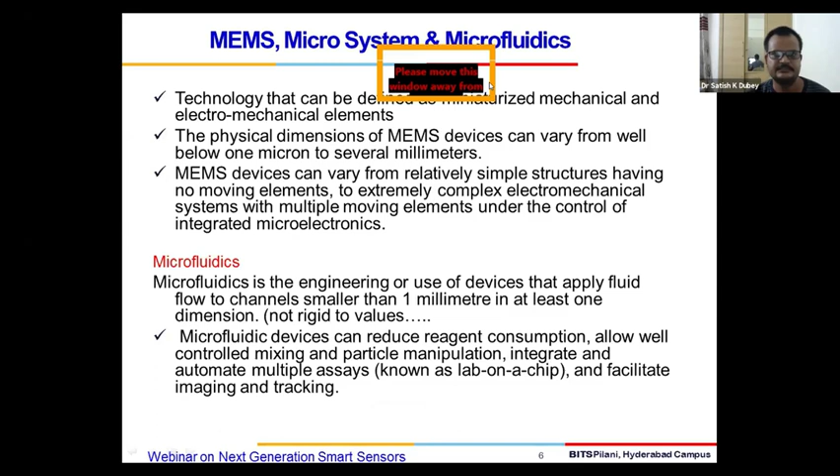So if we start with miniaturization, the first point that comes to mind is what is MEMS and what is microfluidics? Technologies that combine mechanical and electromechanical elements are called MEMS. The physical dimensions of MEMS vary from application to application. It may be very small, in micron size, or it may be up to certain millimeters. MEMS devices can be very complex devices with multiple moving components, or a single cantilever can also be a MEMS device. Sometimes MEMS devices have integrated microelectronics inbuilt with these miniaturized devices.

These days, in addition to that, a separate field is growing that is called microfluidics. Microfluidics is the engineering of devices that apply fluid flow in a small channel. These small channels may be in the dimensions of millimeters, microns, or sometimes nano dimensions. Microfluidic devices are very popular these days because they handle very small quantities of reagents, and they can easily integrate with multiple other assays. The combination of these microfluidic and MEMS devices we call a lab on chip, which facilitates various processes related to industrial and biomedical applications.

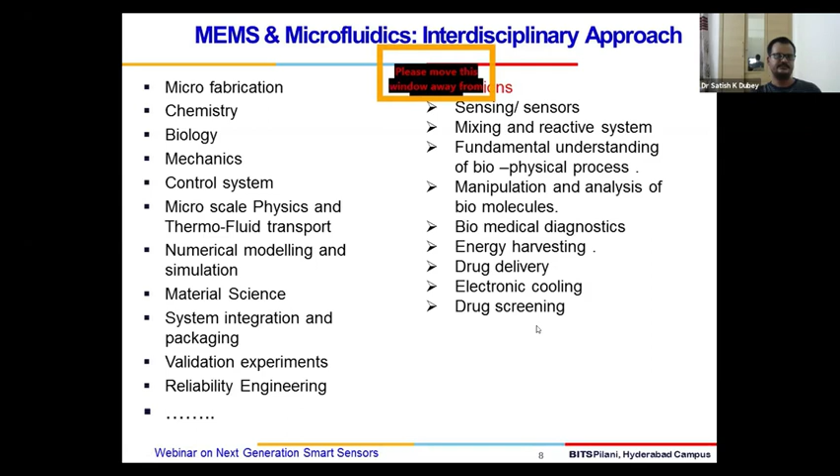It gives a fair idea that this does not belong to a particular branch of engineering or science, but it is an interdisciplinary subject. And a wide variety of applications we can see here for miniaturized or MEMS devices. Out of that, the pioneer application is sensing. In addition, there are many other applications like mixing, fundamental understanding of biophysical processes, biomedical diagnostics, energy harvesting. One of my colleagues will be talking about energy harvesting today. Then drug delivery, electronic cooling, drug screening, and many more.

So when we talk about sensors or micro devices, they follow certain steps from conceptualization to the design or final product. It starts from design and simulation, which involves a variety of simulation tools or in-house codes people use to understand the dependent parameters, how they affect the physics, and what dimensions one should work on before starting experimentation. One can use multi-physics software or their own code if the physics allows it.

Then at the same time, a variety of fabrication processes are involved in microfabrication. To name a few: photolithography, direct laser writing, soft lithography, laser engraving, paper-based 3D printing, and many more. With time, the processes are evolving at a greater pace.

At the same time, these devices or sensors use certain detection methods. These detection methods can be broadly classified as optical. When we say optical, most of the time it is related to colorimetric or image-based analysis. At the same time, luminescence-based. Luminescence in a broader sense, we say chemiluminescence, and a subset of chemiluminescence is also available in the form of

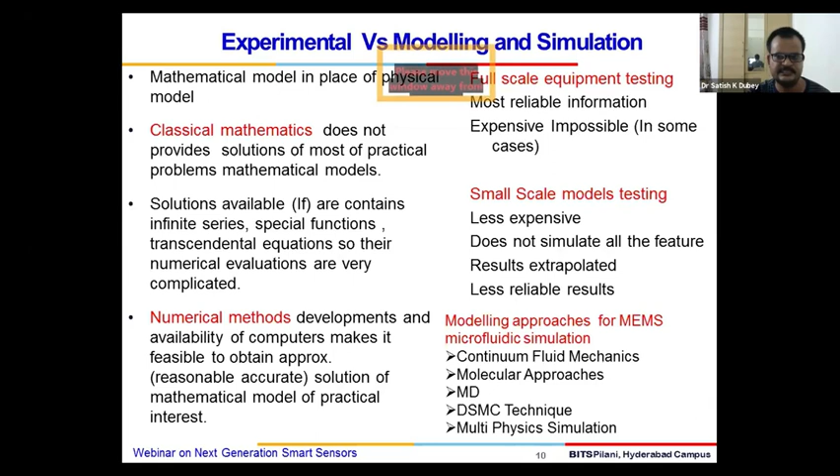So up to a certain limit of the characteristic dimensions, one can use continuum fluid mechanics. If the continuum theory is not valid, one can go for the molecular approach, like molecular dynamics, or multi-physics simulations if multiple physics are involved. So why do these simulations? Because experiments may be costly, and n number of experiments are required to understand the physical phenomena. Beforehand, one can understand the physical phenomena at greater length. So this is the importance of modeling.

So with this brief idea about miniaturized sensors, we will start talking about sensors. Sensors, as you know, are anything which can sense something. When I say something, in basic terminology, we call it a measurand.

Anything we want to measure, we use a certain device, and that device is called a sensor. These sensors may be qualitative sensors, on a yes or no basis, or quantitative sensors which quantify the particular measurand values. So the names of sensors are given based on the measurand. At the same time, they are given based on the way in which we measure. Like today's topic of discussion is electrochemical sensors. So this classification is based on how we are going to measure the value of the quantity of interest, that

is, what we call the measurand. So in MEMS or microfluidic sensors, as I have discussed a little earlier, they can be classified into three subheads: optical detection, luminescence detection, and electrical detection. Optical detection has two subsets: colorimetric and image processing; then chemiluminescence and bioluminescence are part of luminescence. If, as a result of a chemical reaction, some light is coming out and that is considered as a detection parameter, it is called chemiluminescence. A subset of chemiluminescence is bioluminescence, where the chemical reaction takes place in a living organism. The light coming out is then called bioluminescence.

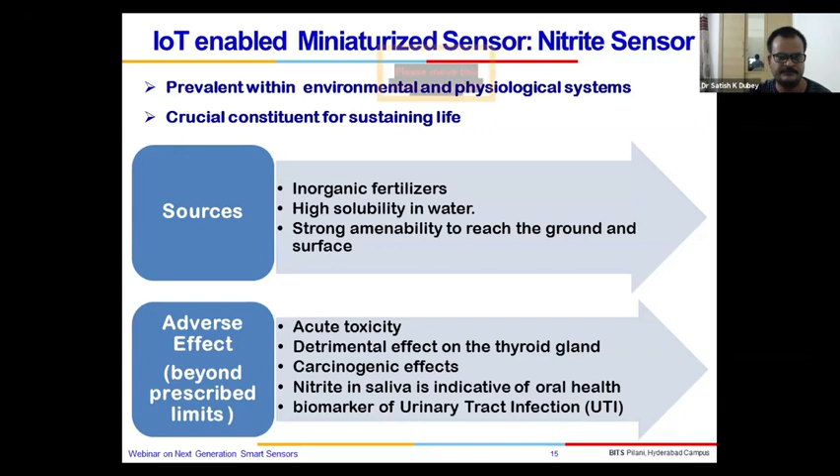So if this limit is exceeded, it causes acute toxicity and detrimental effects like carcinogenic effects of nitrites. At the same time, nitrite detection in saliva indicates oral health. It is also a biomarker of UTI infection. These are the motivations to develop a miniaturized nitrite sensor. So briefly, I am going through the different steps of the development of the sensor.

We first do simulation to come up with the dimensions of the microfluidic channel. Here there are two inlets, one for the reagent and another for the sample, flowing through small-dimension channels. And this is the detection zone. With the reagent reaction, the color will change. In this case, we are using the Griess reagent assay for detection of nitrite. Beforehand, we performed multiphysics simulation with COMSOL to find the suitable dimensions.

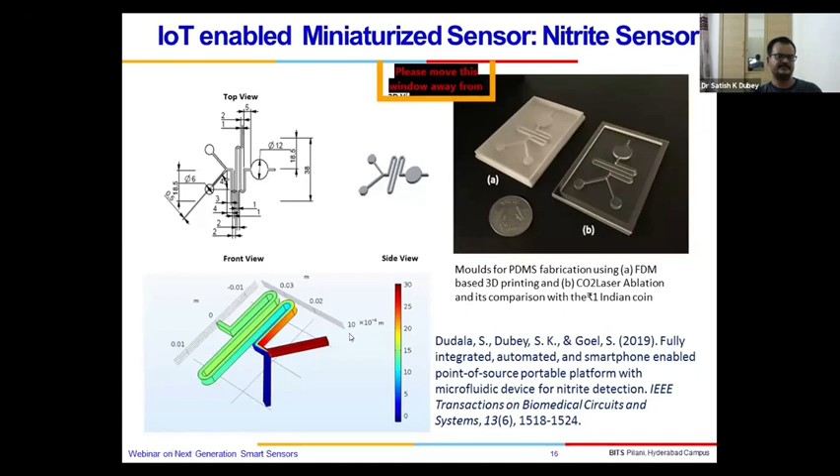This is the actual fabricated microfluidic channel. It is a 3-layer channel: PDMS channel, adhesive tape, and on the other side PMMA to close the channel. For the detection zone, we want to make the sensor smart, so colorimetric detection is converted here to photometric detection using a light emitting diode and photodiode. The photodiode was selected such that the photocurrent varies linearly with irradiation, which changes the voltage across the resistance and in turn gives the intensity.

So this photometric detection is used, and to amplify it, we designed a transimpedance op-amp circuit and amplifier circuits, and for that, this is the PCB.

So as a result of Griess reagents, this kind of color change, pink color, and the pink color intensity will quantify the amount of nitrite present in the sample, and that is calibrated in the linear range of voltage variation for these sensors. So this you can say is the device output; on another side we have absorptions, and concentrations are varying. With the known concentrations, we are able to generate a calibration chart.

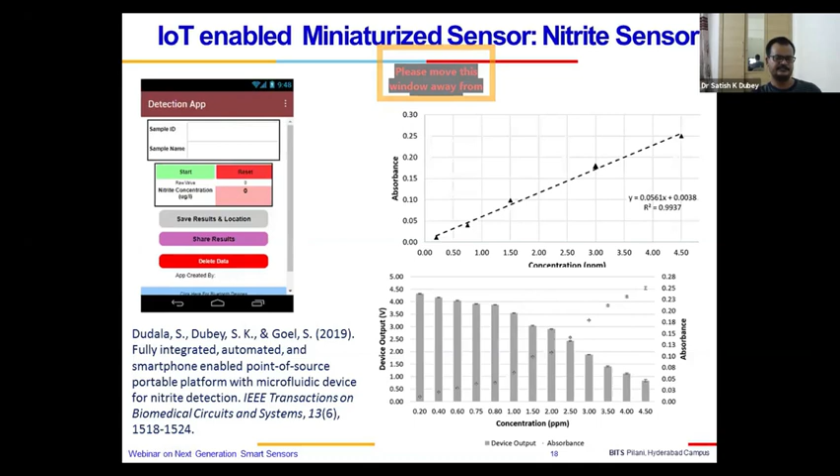And all this data is transmitted through Bluetooth connectivity. It is connected to the mobile, and through geotagging, you can transmit this data to any location or any user and application. So I think this has given a fair idea about the different steps involved in the development of miniaturized sensors. Now I will talk a little bit about electrochemical sensors. I may be a little bit fast here.

So for electrochemical sensors, we are mostly targeting the 3 electrode systems. In these 3 electrode systems, one electrode is called the working electrode, where there is an oxidation and reduction reaction of the species involved. Another electrode is the counter electrode, which serves to complete the electrical circuit of the electrochemical cell or system. The reference electrode provides a reference for the assessment of other measurement parameters.

And mostly we use the potentiostatic technique, also called chronoamperometry, which measures the current flowing through the working electrode as a function of time at a constant potential applied to the working electrode. The current flow is correlated with the concentration of oxidized and reduced species on the surface of the working electrode. It means there is a requirement to achieve surface activity at the working electrode. So in the development of electrochemical sensors, we have to modify the surface nature of the working electrode. By modifying it and obtaining suitable current peaks, we can sense any analytes.

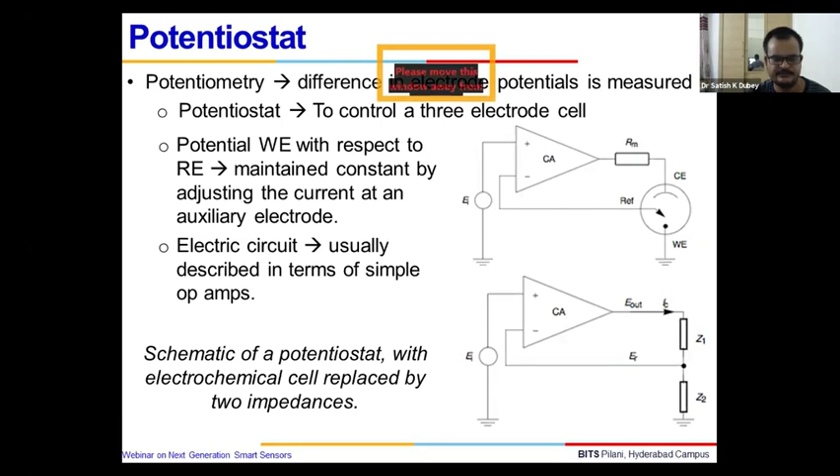So with this, here the 3 electrode system is replaced in the potentiostat with 2 impedances. So a potentiostat is required to perform the electrochemical sensing operations. This potentiostat may be a bulk system or a miniaturized system. If we use a miniaturized system and a miniaturized 3 electrode system together, it can be a next generation electrochemical sensor. This is what I have already explained.

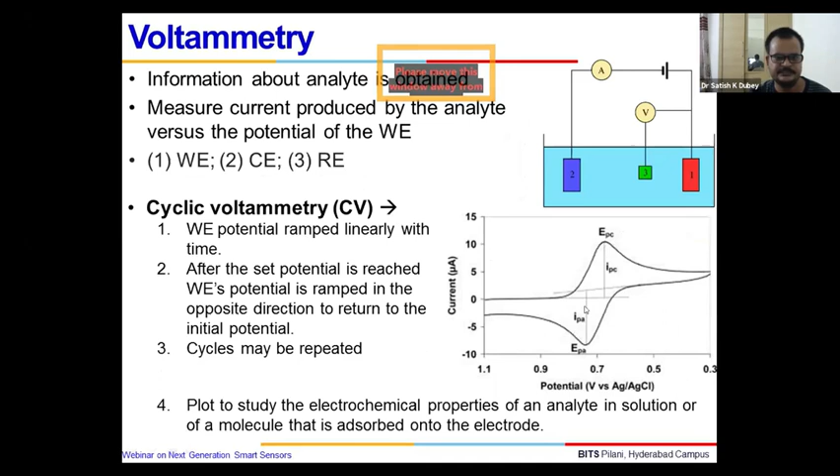As a result of this, you can find this redox loop, in which one peak shows the oxidation peak and another peak shows the reduction peak of the species. Based on the quantity of the current, we can specify the sensing application. As an application, I will take one example here: a miniaturized PMMA platform for biosensing application. So what is the motivation to do this?

As you know, ascorbic acid is an antioxidant required for immunity and cancer prevention. At the same time, dopamine is a neurotransmitter playing crucial roles in Parkinson's disease. Uric acid is another type of purine which basically controls metabolism. There are also metabolism byproducts, like xanthine. So it helps to have a sensor which can sense them all together, because they coexist in human samples or real samples. With this motivation, we have developed this sensor.

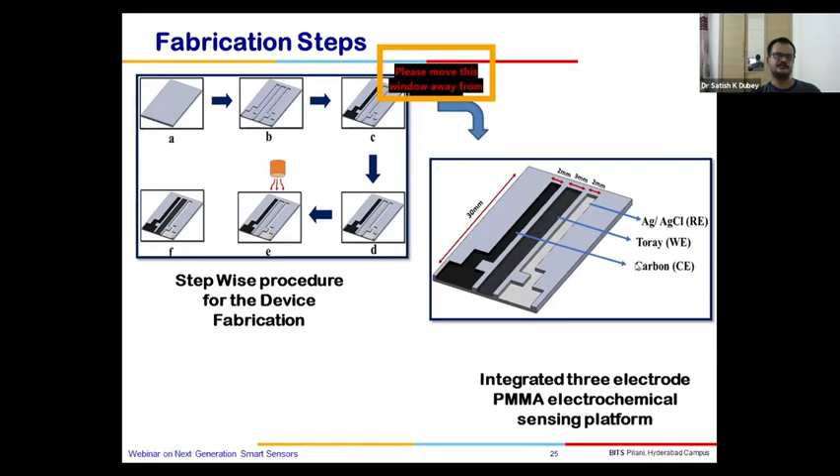So this is the step-by-step process. I may be a little fast. Here we are using 3 electrodes in miniaturized form on the PMMA slots: AgCl, Toray paper and carbon electrodes. Out of these 3 electrodes, one will be the working electrode, another the reference electrode, and one the counter electrode. For the working electrode we have used Toray paper, which has excellent properties.

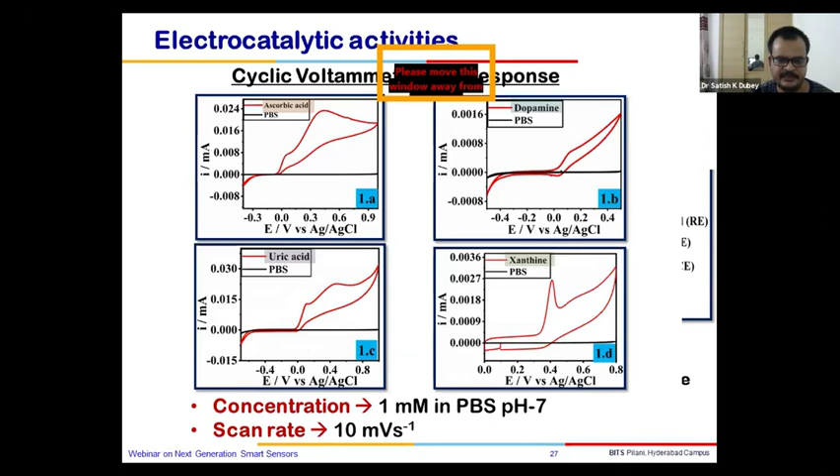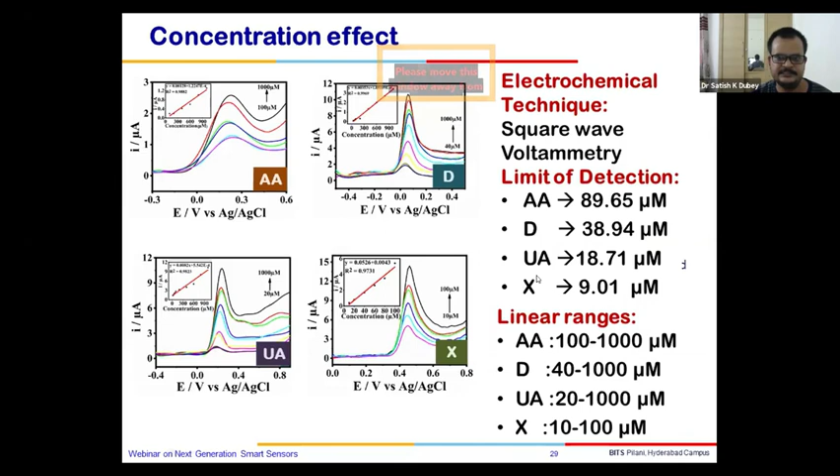At the same time, if you look here, we have performed different scan rates and identified the linear ranges. These linear ranges are shown here in the inset of the diagram, which gives good R values. For the concentration effect, we varied the concentration and made calibration plots. So it is giving the linear ranges of the sensing application. Here on the slides, it is mentioned in what range these can be sensed by developing this particular sensor.

As I mentioned, these biochemicals are present or coexist in a real sample. So we have to find out their interference. For that, we have performed interference studies, and it has been observed that there is no interference among these biochemicals. To confirm the non-interference, we have performed DPV, and the current variations observed are negligible, which indicates that these biochemicals are not interfering with each other during sensing application.

So this miniaturized platform has been developed. If it is integrated with a miniaturized potentiostat, it can be utilized as a next generation sensor for biomedical applications. Due to time constraints, I will move to one example of environmental sensors, and the others I am skipping.

The last example I am discussing here is 3D printed devices for hypochlorite. These days, hypochlorite is very commonly used as a surface disinfectant. It is also commonly used in water treatment plants, chemical industries, swimming pools, clinical industries, and food industries. The concentration of hypochlorite is crucial in deciding its use for different applications.

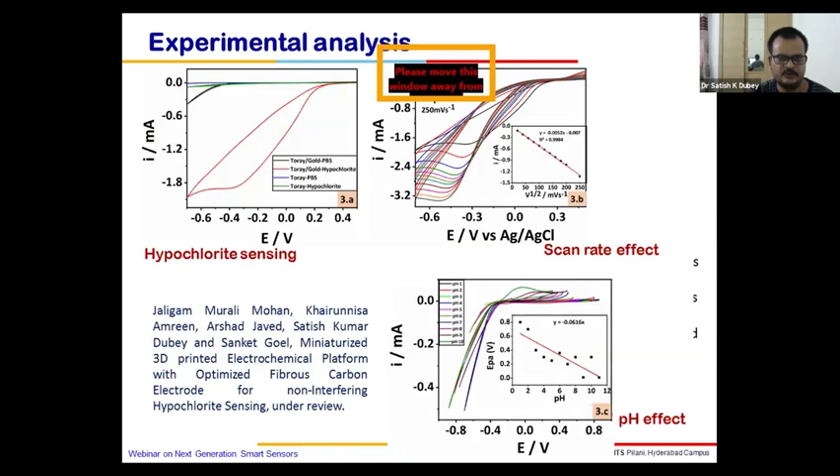For that purpose, we have used Toray paper modified with gold, which worked as the working electrode. We have used counter and reference electrodes of Protopasta. The reference electrode is modified with Ag/AgCl. We have used 1 milliliter of analyte, a very small quantity. Voltammetry studies have been performed, and it is giving very good results, non-interfering with the coexisting chemicals. So with this, I would like to close this session.

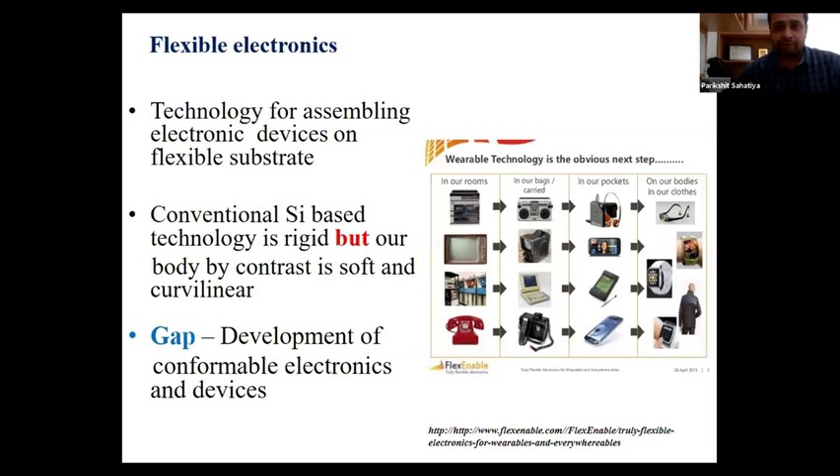But conventional silicon technology is rigid, and the future technology we are talking about is integration of electronic devices onto the body, which is soft and curvilinear. So there's a gap between conventional silicon technology and the predicted future technology. One possible solution is the development of flexible electronic components. Flexible electronics is not only about devices fabricated on flexible substrates and integrated onto the body. It is the technology that allows us to integrate electronic devices on the surfaces of everyday objects.

Just to give you a brief idea about these 2D materials, how these materials have evolved and what are the new types of materials that people have been researching on. The research on 2D materials started way back when graphene was invented. Then different classes of 2D materials evolved after graphene. One among them is transition metal dichalcogenides. It's a whole family, and it has very specific properties which are better than graphene. Some properties of the TMDs are much better than graphene, and hence for specific applications, these TMDs are very useful when compared to graphene.

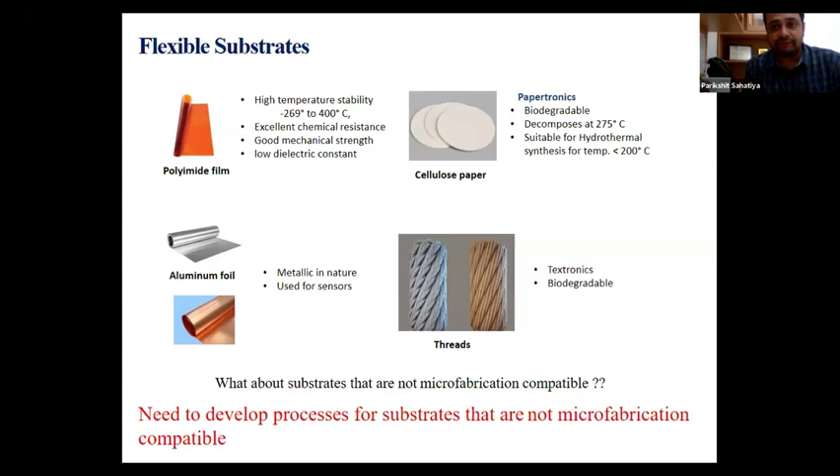So all these things, if we combine them and make a sensor to sense all these quantities, it will be very useful for the person to have a personal healthcare monitoring system. Rather than every time going to a doctor and checking, he can have the sensor integrated onto the body, and then he can check his temperature, the hydration levels, or even human motion monitoring.

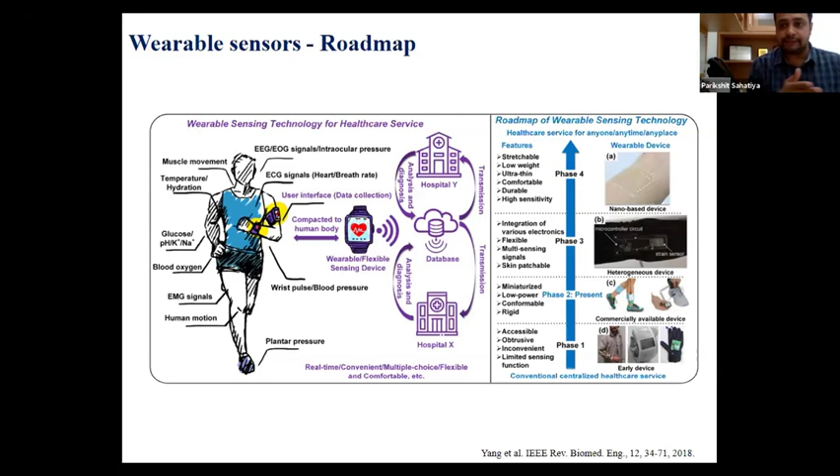So I assume I have given a very brief overview about flexible electronics. What is flexible electronics? What type of materials do we use to make flexible sensors? What are the types of substrates? And what is the roadmap, the future of these wearable sensors? Now, having said all these things, what our lab is doing is the next session of the talk that we are going to discuss.

So we are working towards the development of multifunctional sensors, again for personal healthcare monitoring. And I'll be talking about four different physical signals. So the first thing that I'll be talking about is basically the breath sensors.

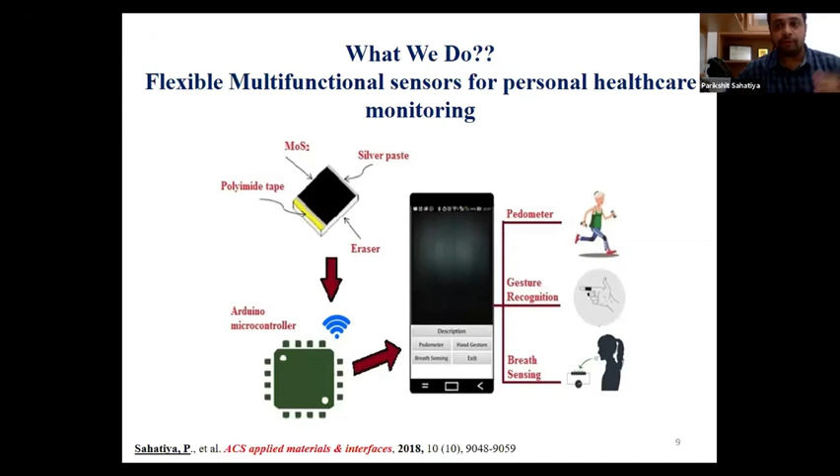Before basically fabricating any device, we need some fabrication techniques, and that I have not discussed as of now. So in general, I will not discuss it for every project. How do we fabricate? The processes that we need to develop for making these flexible sensors, I'll just discuss briefly. And it is very specific to 2D materials.

Yes, it is a big problem because, as I told you, these 2D materials are layered materials, and the number of layers basically determines the electronic properties. So if there is no control over the thickness, you cannot have control over the electronic properties. But anyway, it's a very easy method, and unless you want to tune the band gap of the material, it works perfectly fine.

And the most well-known method that people have been using for the growth of 2D materials is CVD, chemical vapor deposition. It is famous for the monolayer growth of any 2D material, starting with graphene, and then the TMD families and the other families I was talking about. The deposition rate is very high. Further, it does not require any vacuum like we have for atomic layer deposition or PLD. But the only demerit of chemical vapor deposition is that the operating temperature is very high.

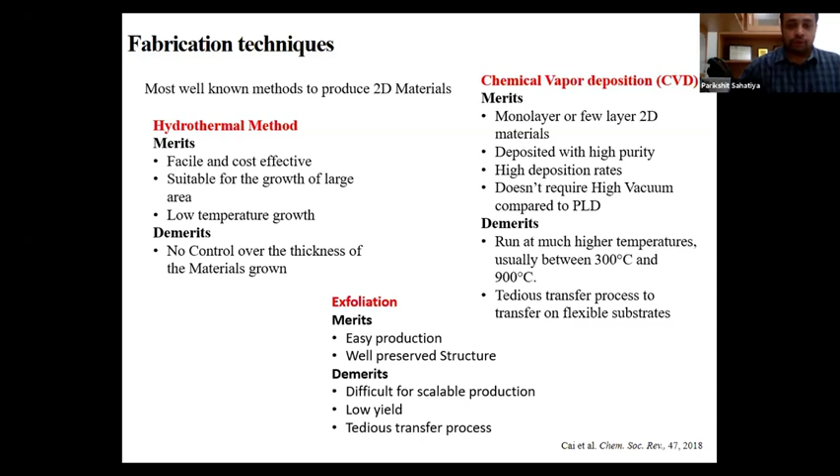So whatever applications I'm going to discuss in the upcoming slides will involve either of these fabrication techniques. So I'll not be going into details about the fabrication techniques. I'll be talking more about the applications that we have developed. But before we go to the applications, we can have one example to show you how we fabricate these flexible devices.

In this case, once you have grown MoS2 on cellulose paper, you can use that as a substrate and grow Cu2S on top of it with the desired parameters. And at the end, to measure any electronic signals, you need metal contacts, and we define the contacts using silver paste, or sometimes copper tapes and several other methods.

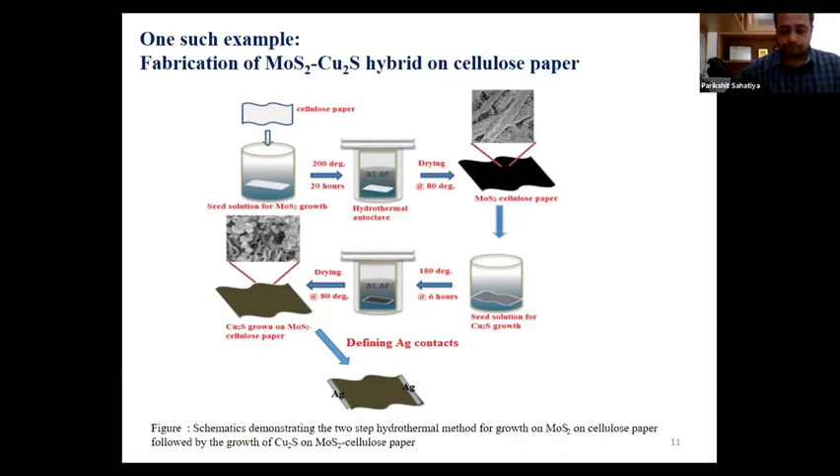So now coming to the applications, the first application is breath sensing. But before we go for breath sensing, it is very important to understand whether the device that you have fabricated is sensing humidity or not, because the breath molecules contain humidity.

Okay, the majority of the breath molecules that we breathe have relative humidity greater than the atmospheric humidity. So it is very important to check whether the fabricated device is sensing humidity or not, and then we can go to a real-time application of breath.

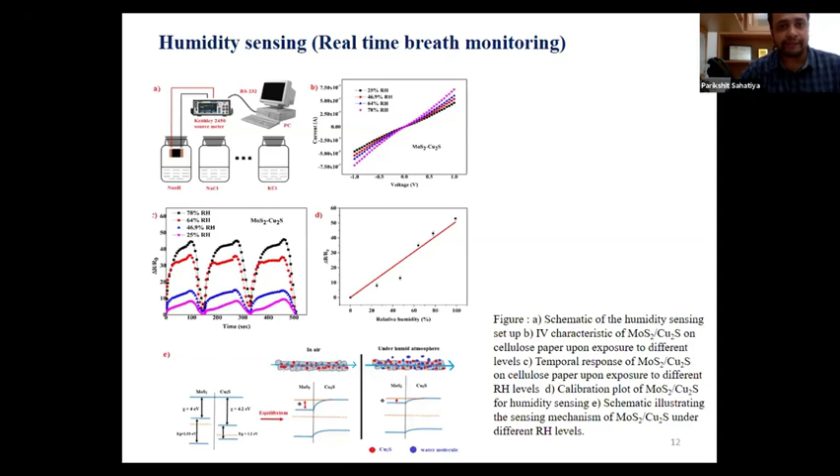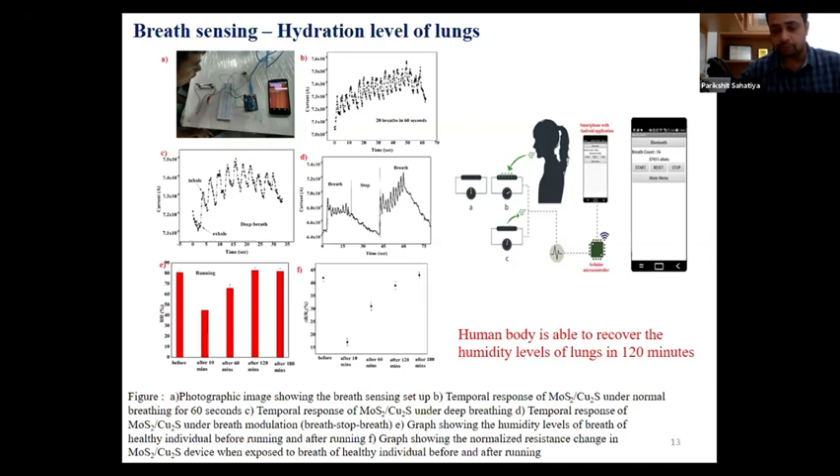So it was a very nice initial experiment to understand that this kind of sensors can be used to check the humidity levels of the lungs. And all this data is transmitted to the smartphone. As I told, the number of peaks tells you the number of breaths that you have taken, so you can always count your breaths. This experiment was performed only on a healthy individual, and it was an initial proof of concept.

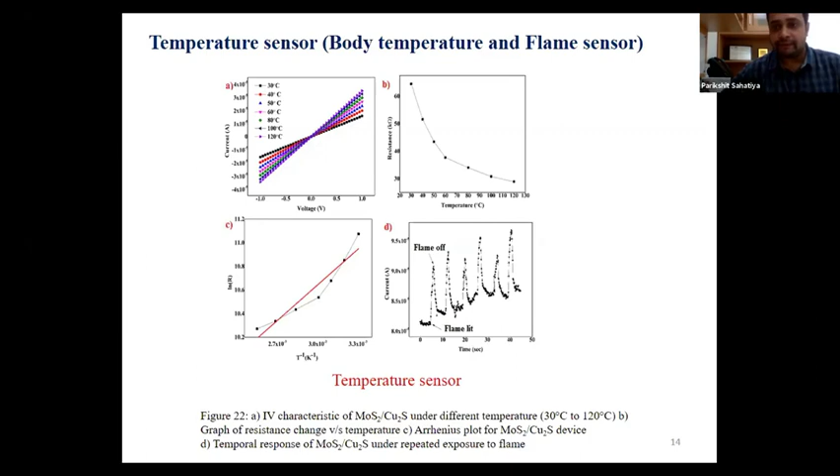The other parameter that we have tested is temperature. It can be a body temperature, or it can be a flame sensor. I guess the graphs are self-explanatory. As the temperature increases, the resistance is decreasing, and it is a simple semiconductor phenomenon. We did a simple flame on-off experiment, and as you can see, the peak is very prominent.

Now coming to more applications towards physical sensors. One such physical sensor is a strain sensor, which can be used as a pedometer for calculating the number of steps that a person is taking, and by a mathematical formula we can also calculate the calories that he has burned in that specific duration.

So we fabricate a sensor and integrate it onto the knee, and the moment that individual walks or runs, strain is developed in that particular sensor, and then we get a peak. That peak is the current peak, because all these sensors are resistive sensors. So again, each peak corresponds to each step that a person has taken.

And all this data is again transmitted to his smartphone, showing how much time he has walked. It's kind of a Fitbit application, but it involves a proper sensor. It does not work on AI or ML concepts like the Fitbit does. And again, by a simple mathematical formula, we can also calculate the number of calories he has burned.

One more example of the strain sensors that we developed is for gesture communication. These kinds of sensors are used by people who cannot speak, or who are hospitalized and need some assistance. These strain sensors can be integrated onto the fingers of a patient, and then the specific movement of the fingers will send a specific signal to a third person. It can be a doctor, a guardian, or a nurse.

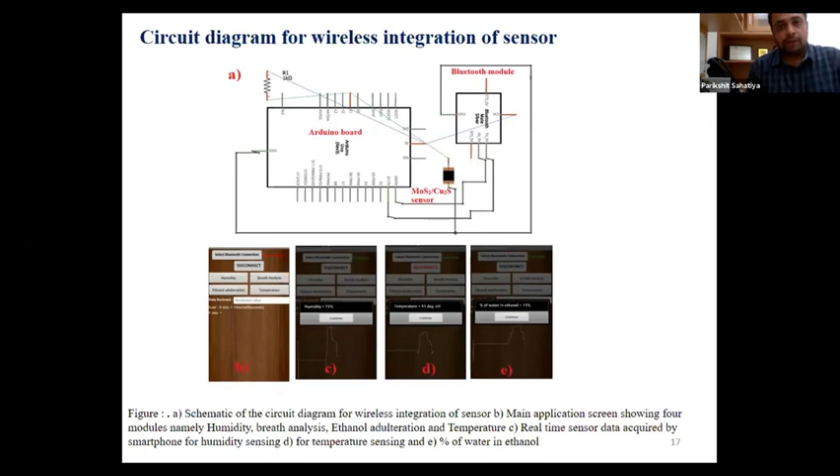The sensors that we discussed till now were resistive sensors, so they were two-terminal devices. But if we leverage the properties of a three-terminal device, which is an FET configuration, we can tune the gauge factor for a strain sensor, or for that matter the sensitivity of any sensor, because we can easily modulate the current flowing from source to drain by the application of the gate. So we tried to do that.

The other application that I want to show is the artificial electronic skin, and I would like to show the fabrication process for this too, because it's fairly simple and anybody can do it at home. In this case we chose an eraser as a substrate, because the eraser is highly stretchable and bendable compared to papers and other polymeric substrates. Then we use a functional nanomaterial, in this case CNTs. And then we did a simple rolling process.

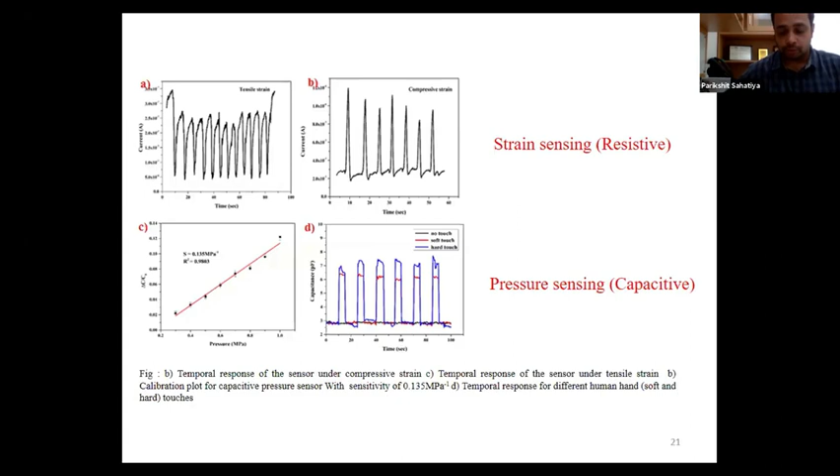That is very important, because in this case there is no need for the front end to distinguish where the signals are coming from. If the signal is resistive in nature, it has come from strain. If it is capacitive in nature, it has come from pressure. And for the real-time application, as we have been discussing, these sensors are integrated onto different parts of the human body. One more beauty of these sensors is that they are able to distinguish tensile and compressive strains also.

And because the particular body part can produce compression, and the other body part can basically produce strain, later we developed an array of these pressure sensors, and it was able to locate the shape and location of the unknown object that was kept on it. So it basically becomes a proof of concept for the artificial skin. So this is another type of application that we have already developed.

And just as the other application for the pressure sensors can be drug dosage monitoring, wherein in many cases a person who is taking the medicine has to take a specific amount of medicine, but he takes many of them. So just as again a proof of concept, we developed this drug dosage monitoring system wherein the pressure sensor can be integrated inside the capsule,

and then if the medicine has been taken out, the specific signal will basically go to its guardian, doctor, nurse, and if more medicines are taken out of the cover, it can also send an alert. So again, I'm not going to show the entire picture of how we developed it. It's just an overview of the entire system that we had developed.

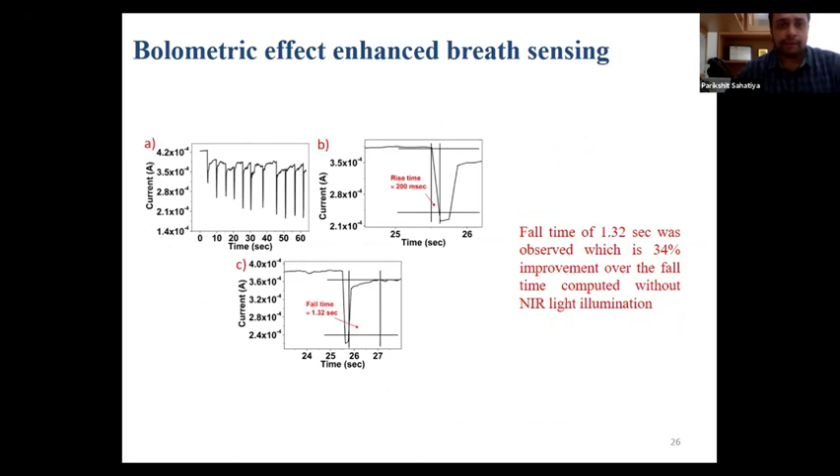It basically can sense the fast breath, it can sense deep breath. And how do we distinguish them? We distinguish them with the frequency of the peaks and the amplitude of the peaks. So we can easily distinguish whether the breath taken by the individual is fast, deep, slow, or has a very high level of hydration or a low level of hydration. So if the data is properly extracted, it can be used to detect many diseases later. And I'll skip this part because it does not have much relevance here.

And again, since we have been talking about 2D materials, there is a new 2D material that I have been talking about, that is black phosphorus. The major problem with black phosphorus is that the moment you synthesize it, it gets oxidized. So we tried to develop a strain sensor based on black phosphorus on paper substrate, passivating it by PDMS. The PDMS passivation not only prevents the oxidation of black phosphorus, but also increases the flexibility. And then again, it was used for human motion monitoring.

The two things that we achieved in this research: a black phosphorus based sensor which is stable for 98 days. Because black phosphorus is highly oxidized, it is very difficult to make the device stable for 98 days. That was one thing that we achieved. And also the sensitivity that we achieved was better than the conventional counterparts.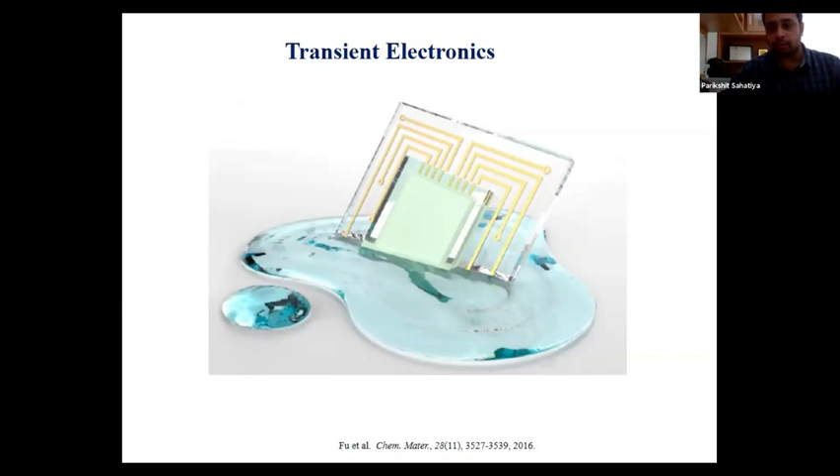So I'll skip this part in the interest of time, but I will take a couple of minutes to discuss this field, which is known as transient electronics. Transient electronics, just to put it in a very vague manner, is an emerging field wherein after the usage of a particular electronic device or sensor, the sensor can be put into triggering factors such as water or humidity, and the device will totally disappear.

The field basically evolved due to the fact that many of the conventional electronic devices use silicon, and it is contributing to a lot of e-waste. And also with the development of flexible electronics, most flexible electronics are fabricated on polymer substrates, which again are contributing to the e-waste indirectly. So this type of technology might take care of the e-waste, because the devices can totally disappear.

And the other motivation for this field was in biomedical, because once we do a surgery, we put the electronic devices into the body, and we need another surgery to remove them. So basically, we can do a surgery and put in these transient electronic devices, and in due course of time, these devices will disappear.

So we do not need another surgery. So these were the two main motivations why this field evolved. And we have been trying to do our part in this. So we have been successful in developing multifunctional sensors which are water soluble. And the sensing that we have been doing is again pressure, breath, and strain sensing. And as you can see at the down left part, these devices are basically water soluble. So in 360 seconds, the device basically totally disappears.

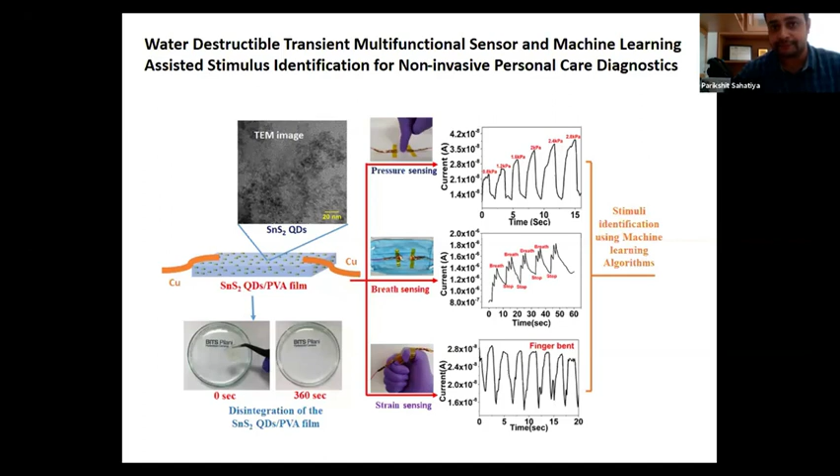So to conclude the entire talk, yes, it is possible to fabricate this flexible electronics without even going into the clean room. We can do these simple processes and fabricate these devices which work very well. The electronic waste can be reduced basically by fabricating more and more devices on cellulose paper rather than polymer substrates and silicon. Multifunctional sensor is possible. I did not get much time to discuss the multifunctional sensors, but it is possible by the use of artificial intelligence and machine learning.

And lastly, the water soluble electronics is a reality. Okay, and the smart sensors and the smart devices that can be worn on humans are definitely the future and have many potential applications in many diverse fields.

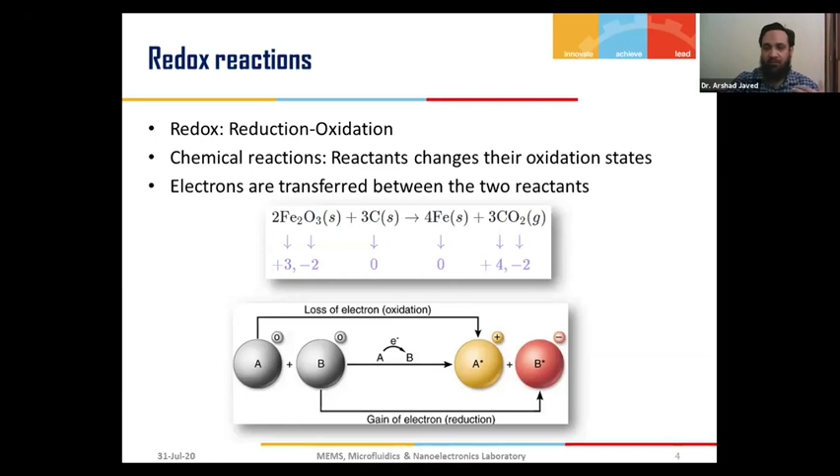So this is the main idea. That is how we can generate electricity. We can have a flow of electrons, or current, in a particular circuit. So let us discuss the pros and cons of this particular methodology. So what may be the pros and cons?

Before that, let us see the image here. You can see a car here, okay? And then you can see a fuel cell, okay? And what the fuel cell does: you can see that we have a hydrogen tank here which supplies hydrogen, and it takes oxygen from air, correct? So both react together in a redox reaction, and it generates water and heat, plus there is a flow of electrons from one part to the other, which is utilized to run an electric motor. So this is the whole idea.

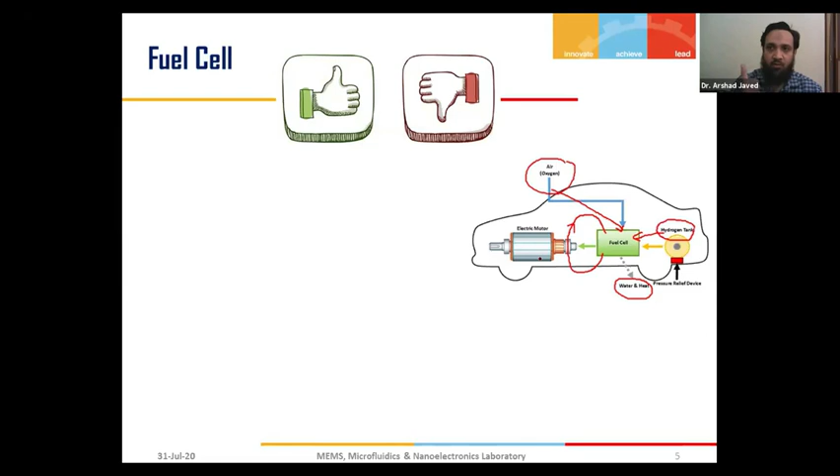Now, in the light of this phenomenon, let us try to see what is good and what is bad. You get higher efficiency. Why do you get higher efficiency? Because when you take a normal fuel like gasoline, petrol, diesel, etc., you actually burn it somewhere and convert the chemical energy into mechanical energy. Then the mechanical energy gets transferred to generate electricity, or you can directly use the mechanical energy to run the vehicle.

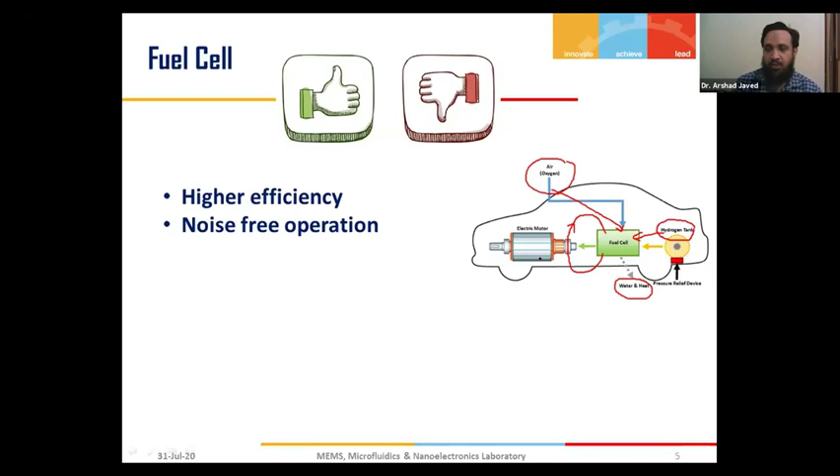But in this fuel cell, you reduce those intermediate stages of generating the mechanical output from a chunk of liquid fuel. So since you minimize many steps of generating useful work, the efficiency is always higher in a fuel cell compared to engines. Then you can see one more thing, that is noise-free operation. This kind of fuel cell provides noise-free operation.

And then the reactants have to be stored outside, similar to how you store fuels. And compared to batteries, nowadays electrically driven vehicles and hybrid vehicles have a particular life, like 8 hours, 20 hours, and so on. But for the fuel cell, the benefit is that theoretically it runs for infinite time. The constraint is, as long as we keep supplying fuel into the fuel cell, it keeps generating electricity.

And unlike batteries, where after multiple thousand cycles of charging and discharging the battery actually deteriorates, that is not going to happen in a fuel cell. So this is one of the positive points.

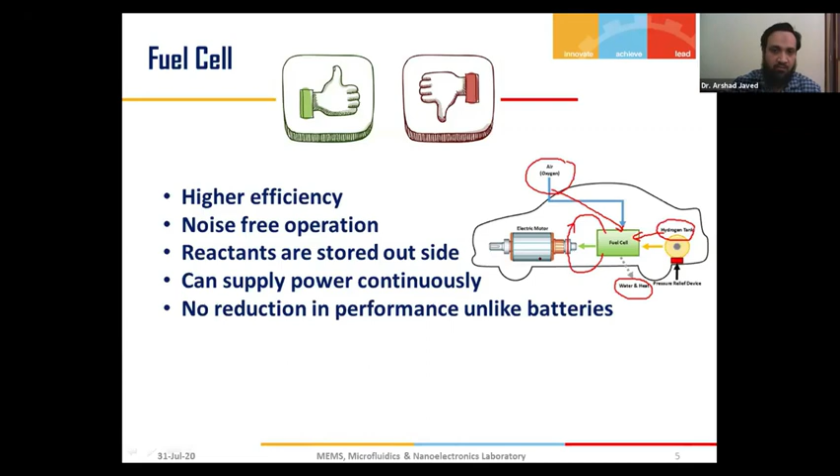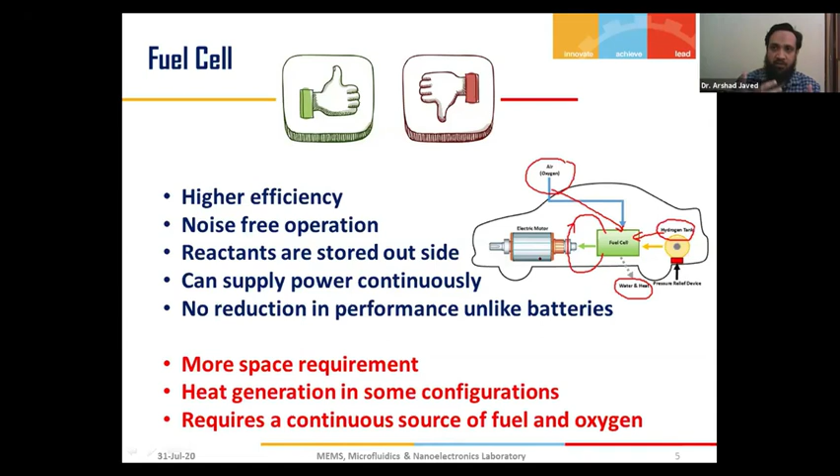As a negative point, more space is required for a fuel cell when you talk about the bulk fuel cell. And we have seen that in a few configurations, not all, a lot of heat is generated and water and emission take place. So that is an issue. And it requires a continuous flow of fuel and oxygen.

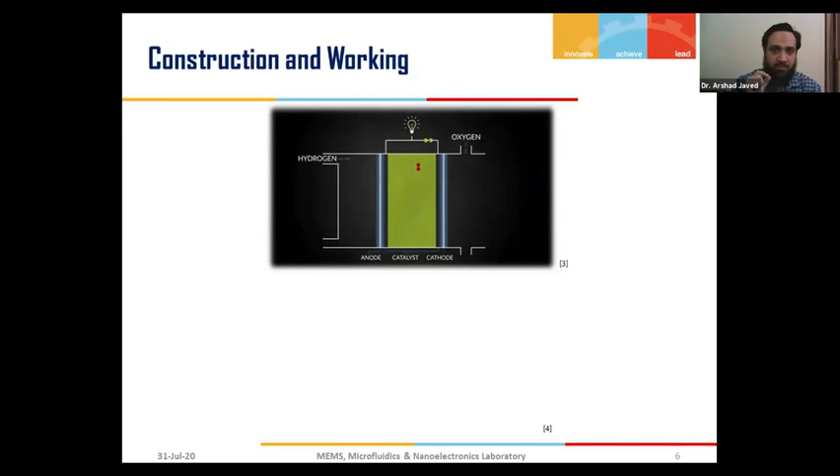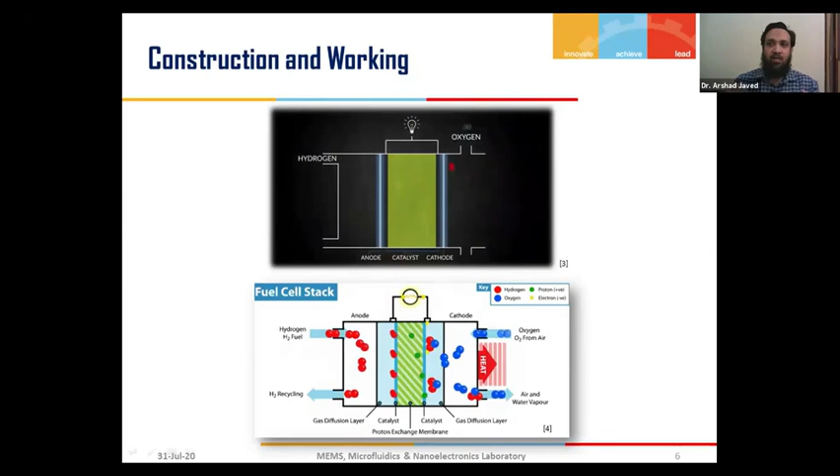At the same time, you allow the proton to move through the filter and not the electron. So it's a kind of a nice mechanism or trick which is involved to develop this fuel cell. In another animation, probably this will be more clear to you. You can see the hydrogen fuel is entering here, and you have anode and cathode, and we have a membrane, and you can very clearly see that only protons are getting passed through this membrane, while the electrons are forced to travel through an outside circuit, and that is how we generate the electricity.

Now coming to microbial fuel, what is that? So similar to the chemical reaction we have seen, there are bacteria. There are several kinds of bacteria which separate or emit or help to take out the electron from the waste product. So when you keep a bunch of bacteria in waste water, for example, they undergo a reaction, and then electrons come out from that. Now here again, you have to apply the same trick. So the trick is to take out the electrons through the wire out from the circuit, and then the rest of the things will move towards the oxygen molecule.

So let us see how it works. So in this video, you can see that the bacteria are generating electrons through the waste product. These electrons are not getting here. You should understand that the electrons have very high affinity to the oxygen molecule. They will go wherever the oxygen molecules are. So till now, we are not allowing the electrons to combine with the oxygen molecule.

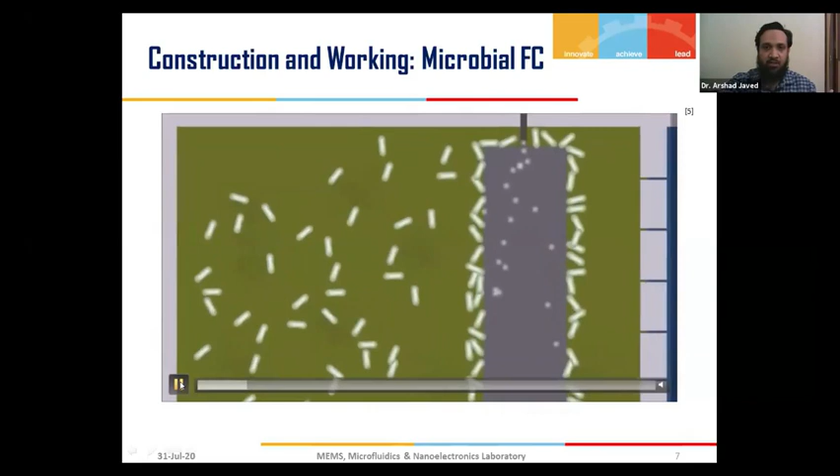This is totally sealed. And then the electron moves towards the source of oxygen, which is kept at the other side. And in between, we have an electrical circuit, and we harness the energy. And here, at the membrane side, we allow the electrons to interact with the oxygen molecule. So this is how we are able to harness the energy through the waste product and the microbes. Now, we have seen the basics of fuel cells, and the kind of methodology involved to take out the electron from the reaction and use it as a current source.

Now, here you should understand when we miniaturize this fuel cell at the micro level, the kind of power we are going to get is 0.03 to 450 milliwatt. It's low, and the output voltage also varies from 0.5 to 1 volt, which is somehow good enough to charge your mobile phone, though it takes a lot of time. So the issue arises here, how to miniaturize this particular thing. And when you see this power output, you obviously think of stacking multiple cells so that you can increase the output which is coming out from here.

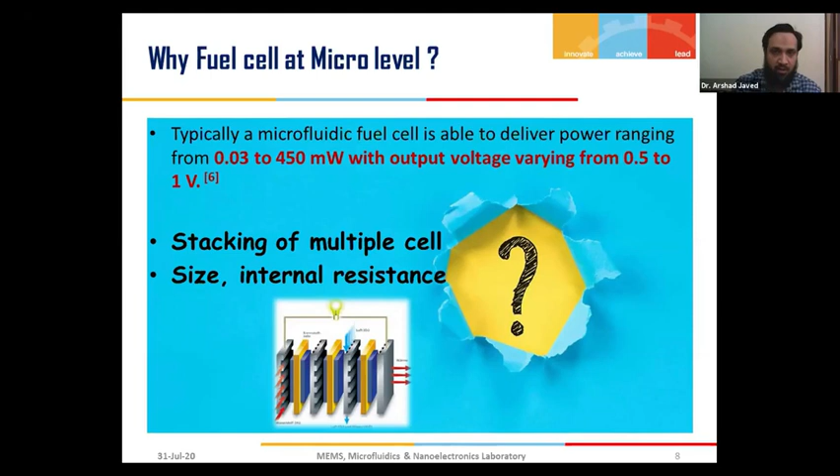Also, when you do the stacking, a lot of issues come out: size, internal resistances, connections, reliability of the device, and robustness of the device. So this is where we think of building a big cell out of multiple miniaturized fuel cells. So here itself, we should ask ourselves, why are we going to devise a micro level fuel cell while bulk fuel cells are available? Why emphasize generating minute amounts of current, voltage, power and current densities while you have a good amount of voltage and current generated through bulk fuel cells?

So let us see this scenario. As you are well aware, there is a lot of focus on microelectronics and microfabrication techniques, which has led to different devices which were not possible probably 5 or 6 years back.

If you find, such devices like POC devices, smart cellular phones, and personal digital assistants were not available. Now, when these devices come in the market, they also put a demand on miniaturized power sources. So these power sources can be batteries, fuel cells, and electrochemical capacitors, kind of things. So that is why we can understand that there is a need of developing such small micro level fuel cells.

And then this power should be in tune with the functional requirement. Like if you implant a kind of electrical device in a human body, you need to implant the battery or the power source also. So imagine a kind of battery which works out of the liquids and chemical compositions available in the human body, which are almost waste. So there you can implant such kind of micro cells or micro fuel cells, which will go inside the human body and generate the electricity, which will help the micro sensor to work.

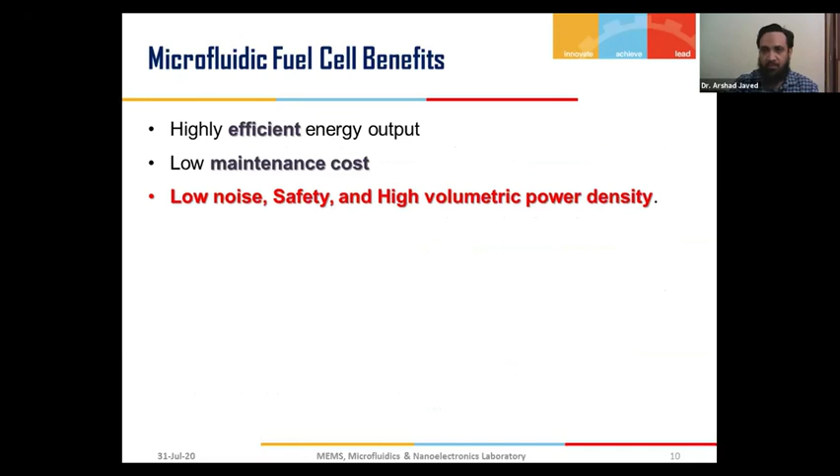So as you know, energy efficiency is high, maintenance cost is low, noise, safety, high volumetric power density, all these advantages are there. The device is simple in case of the microfluidic fuel cell, because we eliminate the catalyst layer, and a membrane layer you have seen in bulk is not going to work here, because we flow the fuels themselves in a colaminar flow, so that it generates its own transition barrier, and then only the proton can move from one side to the other side, and the electron can move outside through the wiring.

So these microfluidic fuel cells are membrane free, and that is how it makes them simpler and more handy compared to the bulk fuel cells. So it reduces the internal resistance and bulkiness of the fuel cell. And in a few configurations where we use capillary action through paper devices or other capillary devices, the fuel pump also is not required. So you can see here that the microfluidic fuel cell, the small miniaturized fuel cell, has got many inherent properties compared to even a bulk fuel cell.

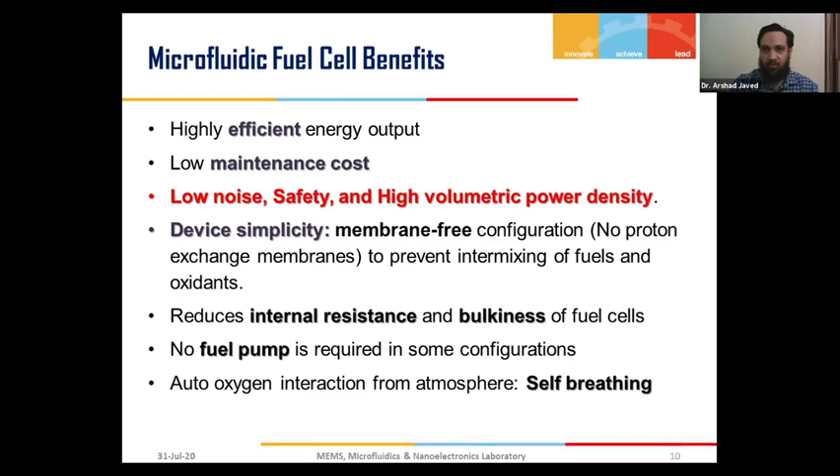And obviously we can make a self-breathing electrode which can take oxygen from the atmosphere directly. We need not have external or peripheral agents to push the fuel towards the development of the power. Now coming to the basic construction, here you can see a Y channel microfluidic fuel channel. I hope you are well aware of these technologies going through the multiple days of this webinar series, where you might have gone through the laboratories also, and you might have observed multiple types of fuel channels and microfluidic channels.

So this is a kind of Y channel where we flow two electrolytes. One is oxygen and the other one is fuel along with H2O. And here you can see both are flowing very slowly. It's a kind of creeping flow. And when it flows at a creeping velocity, it generates a constant velocity and they do not interfere with each other. This undergoes a laminar flow, and this is called colaminar flow. This fuel goes in one flow and this goes in another flow, and there is no interaction; they do not mix together. They get mixed together when they cover a long length.

And before it mixes, we put the cathode and anode on this side. Now the proton moves through this barrier to this co-flow, while the electron moves between cathode and anode. So you can connect a wire through cathode and anode, and the electron can move in a closed circuit, and that is how you can utilize the current. For instance, the redox reaction is shown here: formic acid plus oxygen converts to water and carbon dioxide, and it generates a particular voltage, for example, 1.5 volts.

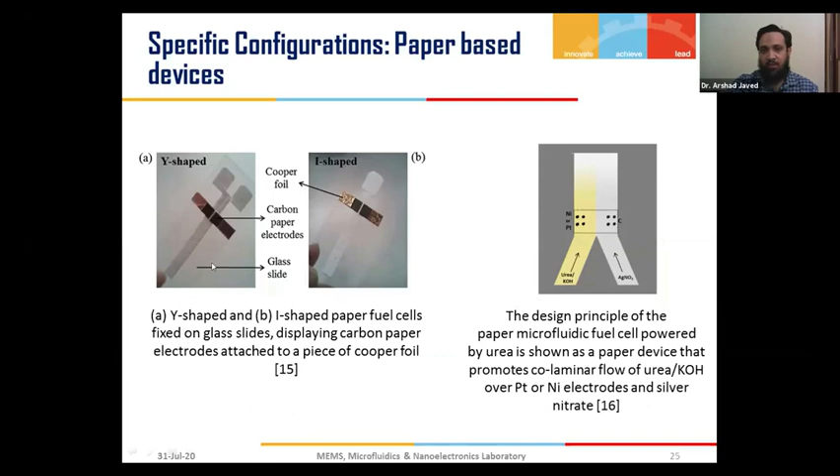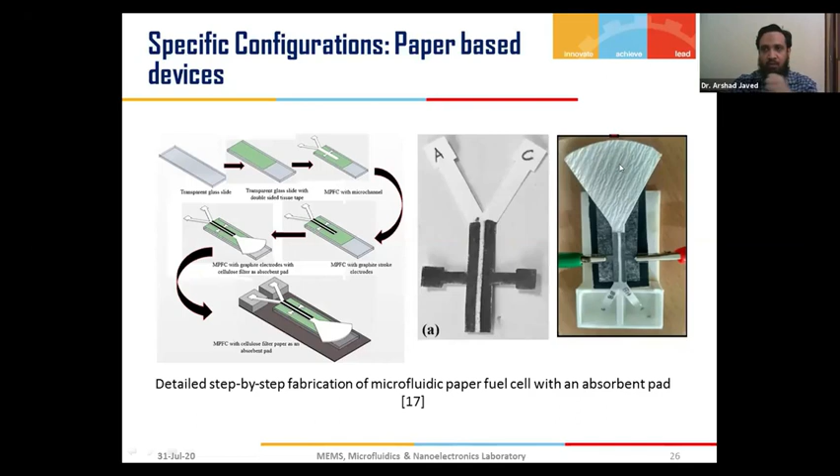Now along the same line we have also done some experiments, and we have developed a paper device on which we use pencil graphite to scribble over the paper, which makes the electrodes. We tested different grades of pencil, and we found a particular optimum number of scratches to make on the paper to develop the electrodes, and which grades of pencil will be useful. We also worked on an absorbent pad which will enhance, reduce or control the flow over these channels.

Then for making the scratches on the paper to develop the electrode, we also tried to develop an automated device which can produce multiple electrodes in one go, and thus the concept of this paper fuel cell can be imagined at a larger scale.

Then one of the interesting works we experimented with in our lab was an aluminum battery, where an aluminum electrode is used with bucky paper, and these electrodes actually give a higher response. We were able to run a small scientific calculator for a few minutes, and LEDs were able to glow through this kind of aluminum fuel cell.

Now let us at the end discuss the research opportunities and challenges. So what are the different things which are still left in this area? Multi-stacking is a burning issue. We have shown you different laboratory setups, but still a setup or kind of product is required which will be useful in real life applications.

Then reduction of internal resistance. People are trying different kinds of electrodes and different configurations through which the internal resistance of the cell can be minimized and you get more power output. Then how to enhance the electrode performance, that is the performance in terms of absorbing oxygen from the atmosphere or from the oxidant, or having a minimum resistance value.

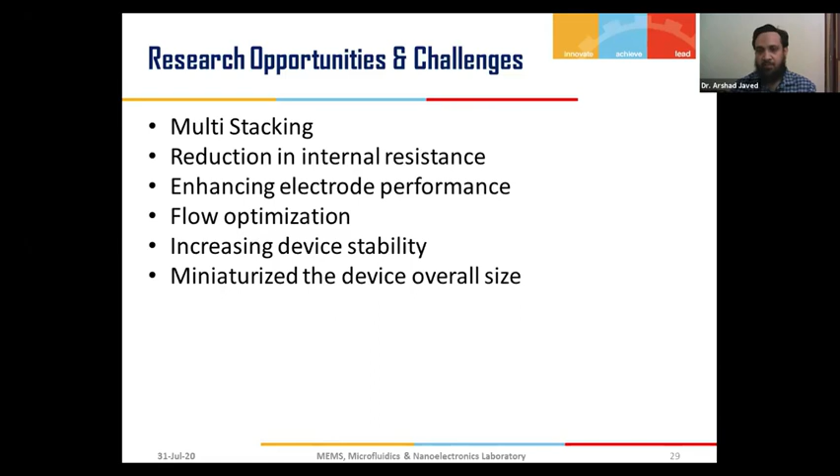Then miniaturizing the overall size. We thought about many things at laboratory level, but finally when you want to develop a product to charge a mobile phone, or a device to power a pacemaker or different biological equipment, you need to think about a smart and compact device. So still this part is left to you.

Then maintaining the co-flow with constant concentration. As you have seen in the equation, formic acid converts into carbon dioxide and water. So how to take this carbon dioxide and water out from the cell to make it more constant, so the concentration can also be kept constant over time.

Then finally we talk about adaptive systems. What is an adaptive system? Suppose your cell's performance is diminishing; some changes should happen automatically, either to the flow rate, the electrode gap, the kind of electrode, or something in the fuel cell, so that you always get a constant output throughout the stabilized lifespan of the cell. This adaptive system is still pending for researchers to work upon.

And many more things, if we keep talking, we keep developing ideas to work upon. So these are a few things I thought to expose you to, towards another horizon of research in fuel cells. So with this I close my small lecture on fuel cells.

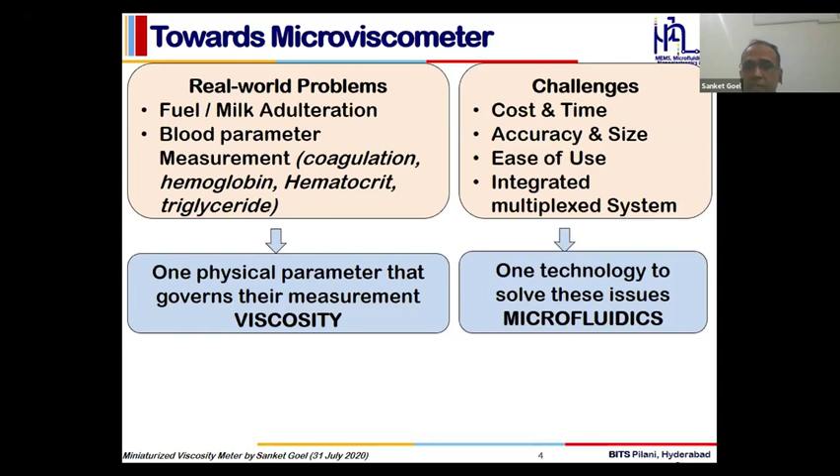And the challenges are cost, time, accuracy. Depending on the application, we have to find a solution. And depending on the solution, we have to find whether we can do a multiplex solution where we can measure multiple samples at a given time. So there are multiple applications. So one common parameter, as I have just presented, is viscosity. And if you would like to eradicate these challenges, one solution can be seen through microfluidics. So we are foreseeing to develop the microfluidic viscometer.

We have been working in this domain for the last several years, and we have tried to develop some handheld and movable prototypes so far. So I will show you some of the things. Because of the time issue, I will not show all the examples. I will just take one or two specific viscometers which have really come to a shape which can be commercialized.

Those of you who are interested to know what ASSURED is, you can Google it. You can find out that the World Health Organization, which has been in the news in the recent past for a variety of reasons, has put forward the ASSURED challenges, which means that any device which is here to give an answer for any diagnostic issue should address these 6 to 7 challenges.

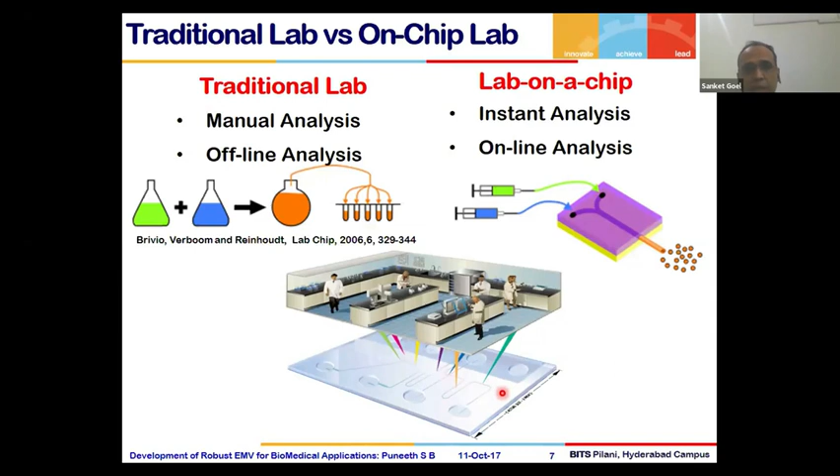So one of the popular viscometers which is used all around is called the Ostwald viscometer. It's like a U-shaped capillary tube. What they do is they try to measure the time the fluid will take to move from A to B. And the time will tell the viscosity. There is a control experiment, and then they do the real experiments, and then they can postulate what is the viscosity of the unknown sample.

So essentially, it is very bulky, it costs a lot, and it is fragile. So you can lose it in a matter of a week. So you need to go away from such viscometers.

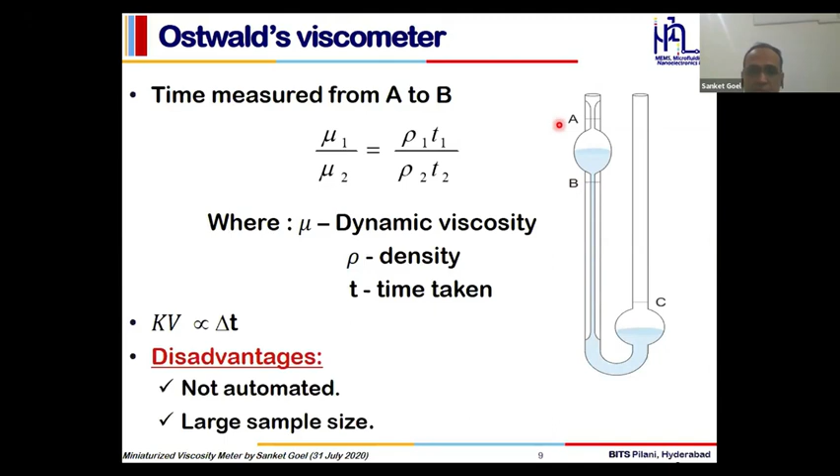Okay, so we have to do some modeling, as we do in any device development, fabrication, and then characterization and testing. So we have broadly divided into 2 fabrication strategies. One is paper-based devices and the other is 3D printed devices. But today I will primarily focus on 3D printed devices because of the paucity of time.

So if you would like to start any new development, first thing you have to write down a small equation. Those of you who have seen this equation before, I really appreciate, but if you have not, please go through this equation. It's a very simple equation. If you talk about any microfluidics, this equation is something which you can never avoid. So if you see a small channel, the viscosity depends on 4 different parameters. W is the width, delta P is the change in pressure, Vm is the velocity, and L is the length.

So essentially, if you would like to find out the viscosity of an unknown sample, you have to eradicate 3 parameters and try to concentrate on one. So you can do it in many different ways. You can either see how the viscosity is proportional to the width square, and somehow you can also manage how the viscosity is proportional to the time it takes. So I will tell you a little later about it.

So viscosity, if you see this parameter, it can be W1 square upon W2 square, as simple as that. And then you can deduce a device where you can measure the width, and you can find out the viscosity of a test fluid by knowing the viscosity of a reference fluid. Of course, imaging is required, which is not the ideal scenario, because if you would like to use it on-field or as a movable prototype, it really hinders our chances to be able to use them. But it is good to do scientific research, and it's good to understand how it works.

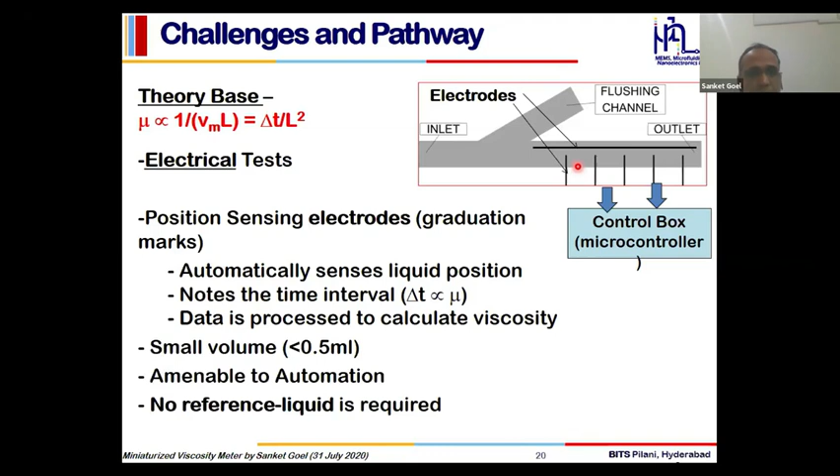So of course, a lot of work has to be done. You cannot just keep it a manual time-taking process. You have to make a control box which can automatically take the time and will tell you in turn what is the viscosity. And more than anything else, you have to develop a device which can have embedded channels and the relevant microchannels. So yeah, I will skip that. This is something which is from the paper device, and I promised you I will not talk about it, so I will skip that.

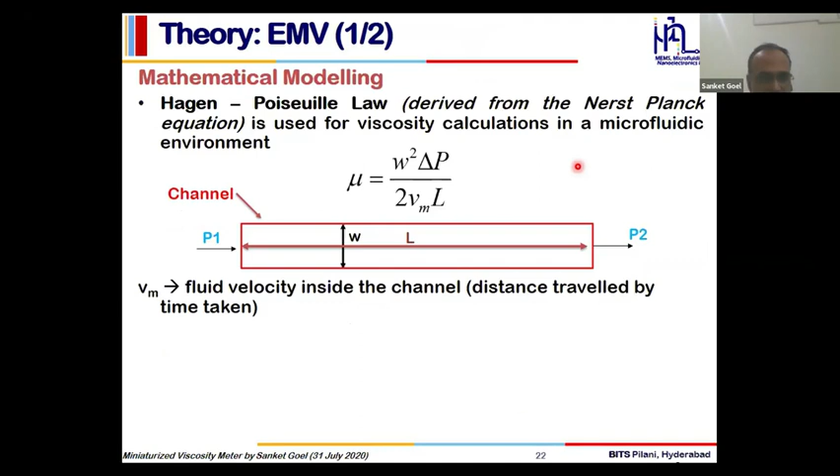So again, with the same equation, you have to work around it, and you can find out the viscosity is proportional to the time it takes. So if you can develop a device where you have a microchannel and 4 different electrodes, which means 3 different inter-electrode distances, you can throw a liquid or fluid inside it, measure the time it takes between 1 to 2, 2 to 3, and 3 to 4, take an average and measure the viscosity. As simple as that.

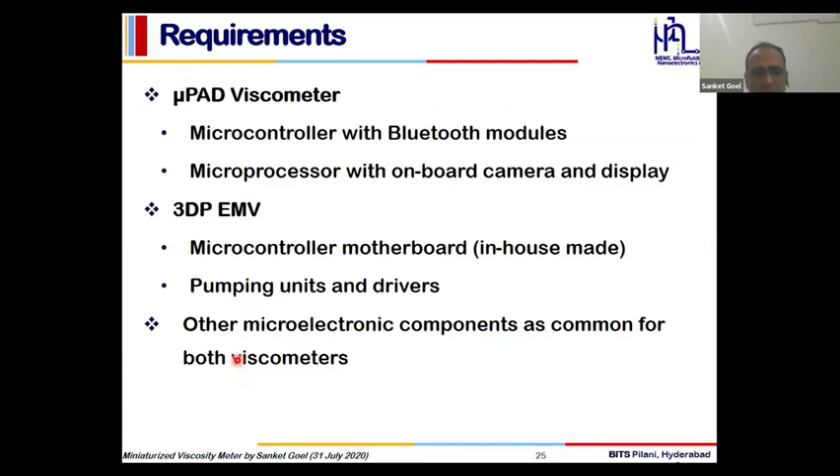But you have to develop an automated device, you have to develop a microfluidic device, you have to embed the electrodes, you have to make the microprocessor, you have to develop a mechanism to switch on and off the device. You have to develop the electrical contacts and the microprocessor set. So a lot of development has been done in this process, and I will show very quickly what kind of impact these developments can foresee. So some of the requirements I have summarized from the previous slide. As I promised you, I will not talk about paper.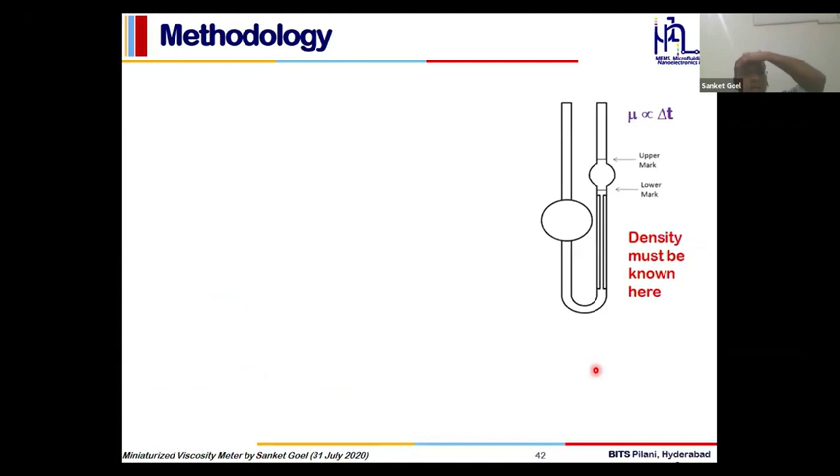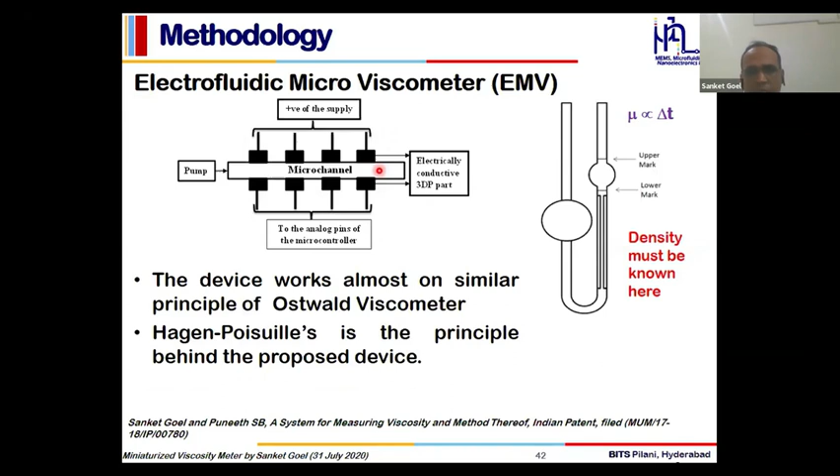But now I will talk a little bit more about the 3D printed device in the next 3 to 4 minutes before I conclude. As I said, we have to create the boundaries which can tell me the time the fluid is interacting at the intersection. So this is the overall philosophy. We have created the 3D printed device, with a very simple 3D printer which can be purchased for a few tens of thousands of rupees. You can see the black zones are the conductive zones, and the other zones are non-conductive zones. So when the fluid moves from left to right, it will hit all these zones, and we can find out the time it is hitting those intersections.

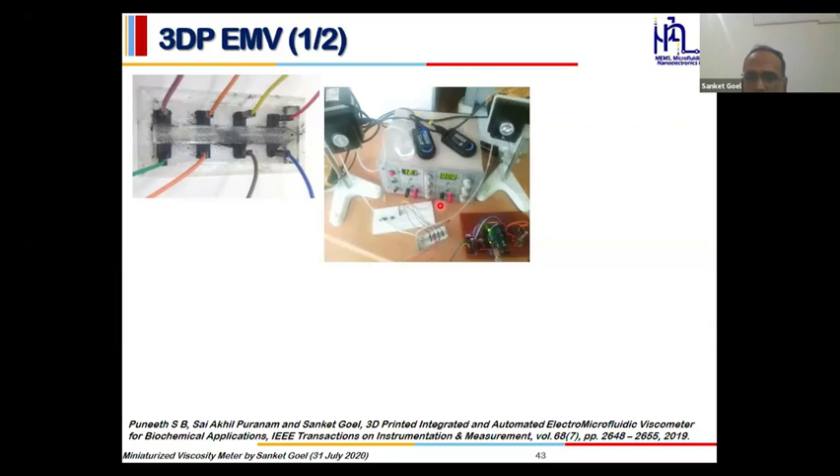So even though it looks like a very bulky system, a very lab-based prototype, I will show you in the next couple of slides how this has evolved into a handheld and movable prototype. We have tried to find out the viscosity of some fluids like acetic acid and milk, which compares very well within the experimental error to the benchtop devices. And you see a little more bulky device.

Now we are going from lab prototype to a small box, which is the shape of an external hard drive or external battery. You can see that this has a microprocessor, a simple Arduino, a few hundred rupees, and a simple screen, again a few hundred rupees. So the overall cost might be 1,000 plus rupees, and with such a small amount of capital expenditure, you can create a viscometer. In fact the Ostwald viscometer itself costs around 15,000 rupees, and it is fragile. And this chip is reusable because we can wash it off, we can prime it, and the chip itself will be maybe 10 rupees or even less than that.

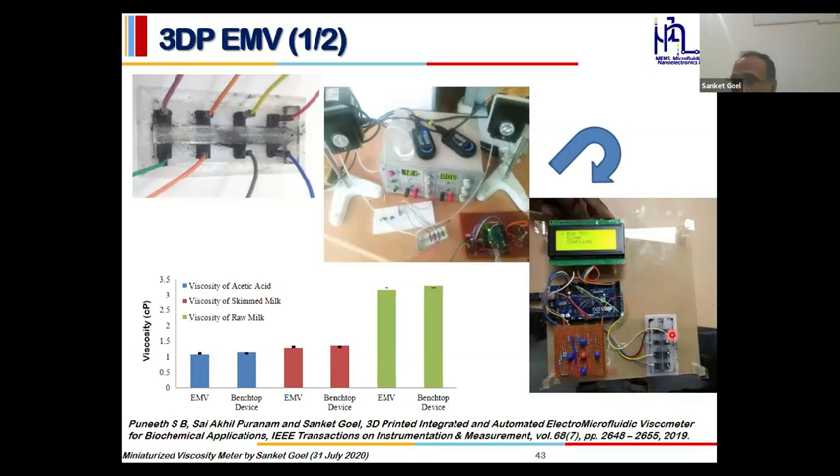So some circuitry which I can skip. You can see that we have tested it for various different samples, again like milk and acetic acid, and it works well in comparison to the standard solutions.

So finally, just wanted to share with you how the lab-based prototype has evolved into a completely packaged viscometer. As you can see, that is the in-house motherboard, which has been developed using a simple printed circuit board method. And you can see this is another version of the device with embedded electrodes. And you have these pumps to drive the liquid, and you can just prime it.

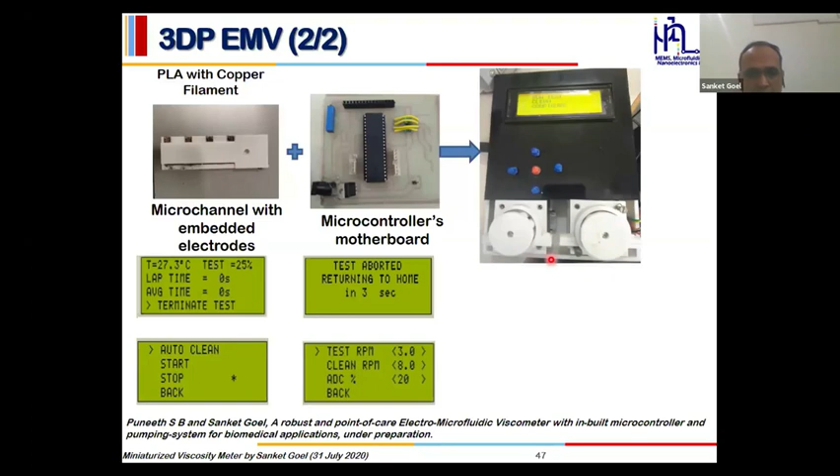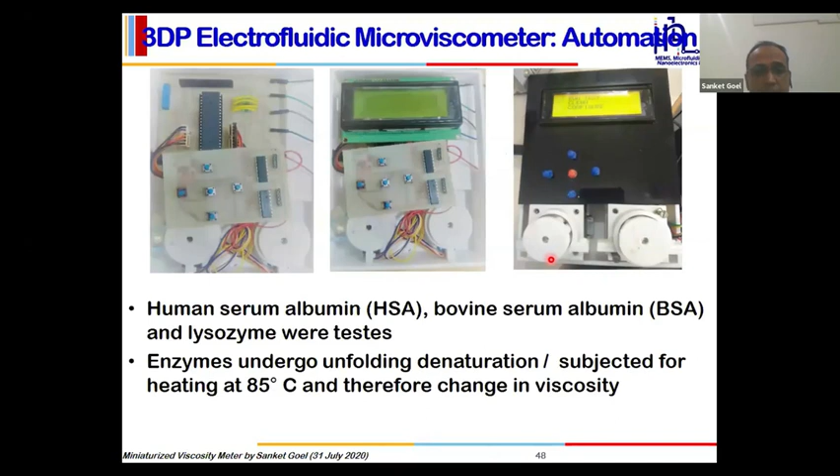So please pardon me that I don't want to spend too much time on biology, but the main objective you can appreciate is that the blue means our device, and the red means the benchtop device. So in all the cases, it is matching, within a few percentage of plus minus error, which is quite acceptable. Let's not worry too much about what we are going to detect right now.

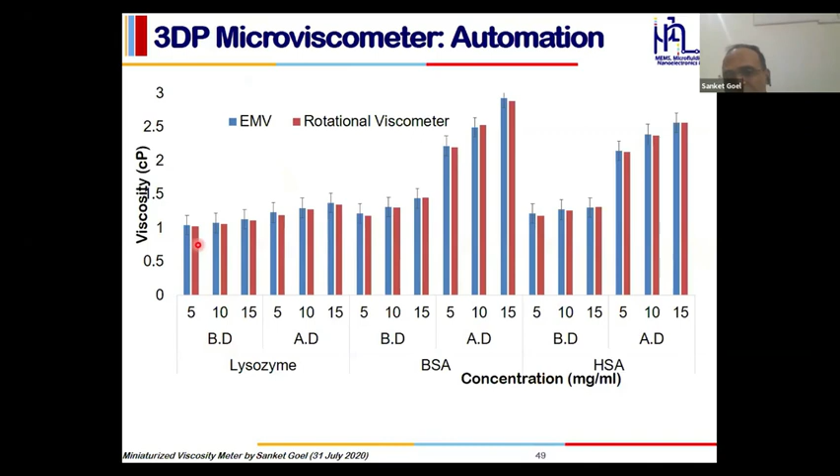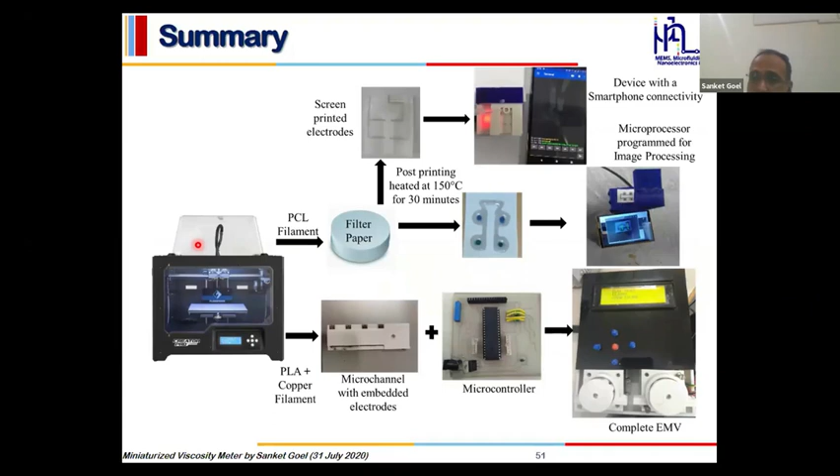So let me summarize the work which we have done in terms of viscometers. We have used various different methods. We can categorize them into paper-based devices and 3D printed devices. And most of the prototypes which we have developed are lab-based, and of course developed as movable prototypes, and quite inexpensive. And we have tried to test not only milk and typical chemicals, but also various biological samples as well.

So just to conclude, I want to sort of pamper our lab, that we have many different fabrication facilities in the lab. And the work which we have seen earlier, most of it has been done in the same lab, which we jointly investigate, all four of us. We have various 3D printers. We can do photolithography, soft lithography. We can make devices out of paper, and we can do testing using optical means, electrochemical means, impedance means, or many different kinds of methods to detect with the diagnostic devices.

And we have many characterization tools. The latest baby was Raman spectroscopy, and we have common facilities. And those of you who are interested to work and collaborate, you are most welcome. We also have a clean room, which is, I think, one of the only academic clean rooms in Hyderabad. Please correct me if I'm wrong, but there are very few academic clean rooms in our country. And we can do class 100 processing as well as class 1000 processing.